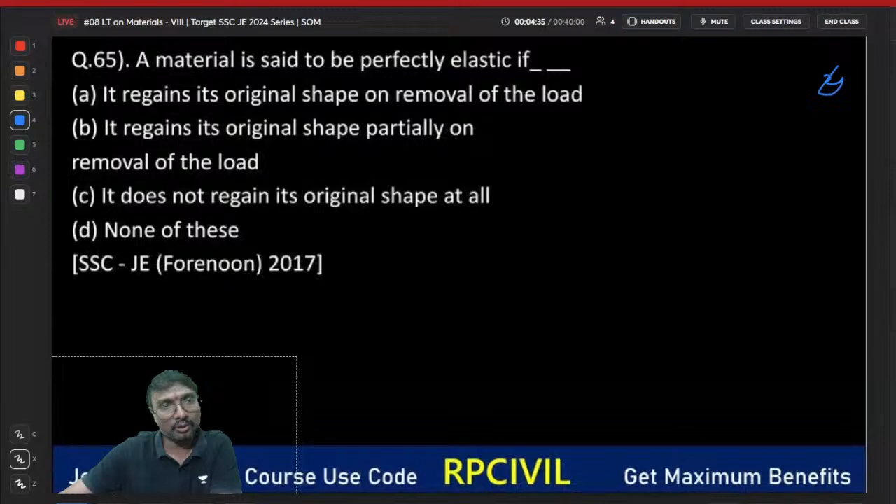So chapter 1 only, so 68 gets over, all of you. This is over, this is over. Okay, this is also over. Yeah, 66 over, 67 over, 68 also over, na? Yeah, 68 also over. Now 69th we are doing now. 69th will be going for now, you can say, right?

Yes, now shall I start the poll? Shruti, Nikhil answered correctly. Pavan also answered correctly. Only you three are there? Yeah, yes, I'll see, I'll check it now. Because just before the class you have sent, I did not see that. Just after class is started, I have seen. So I thought of answering after the class.

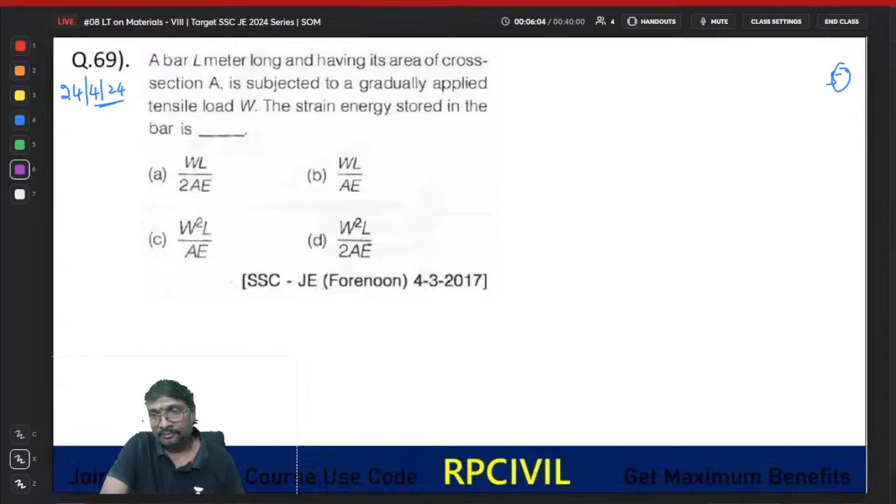Okay, right, what is that? A bar of this L meter length having its area of cross section as A, and is subject to a gradually applied tensile load of W, that the strain energy stored in this is, right? Gradually applied load, right? What is the strain energy? You can say that W square L by 2AE in a gradually applied tensile load, right? That is your W square L by 2AE, or W square L by 2AE only we are having, right? Now shall we move to the next question? That's the 70th question out of here. This is question 70. Select the answer.

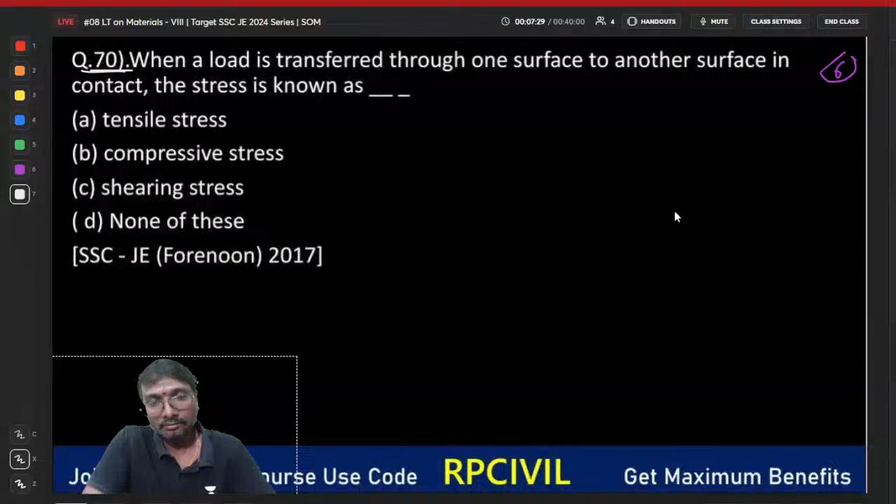Right, what is this? You can say sir is keeping a polity quiz daily. At which time is he keeping it? Gaurav, good morning, at which time?

Why am I doing polity now? Amit Vijay sir is taking the general subjects now, so why should I touch it? I should not touch it, this is not correct, na? When faculty is taking the subject, I should not interfere into his subject. Is that not good?

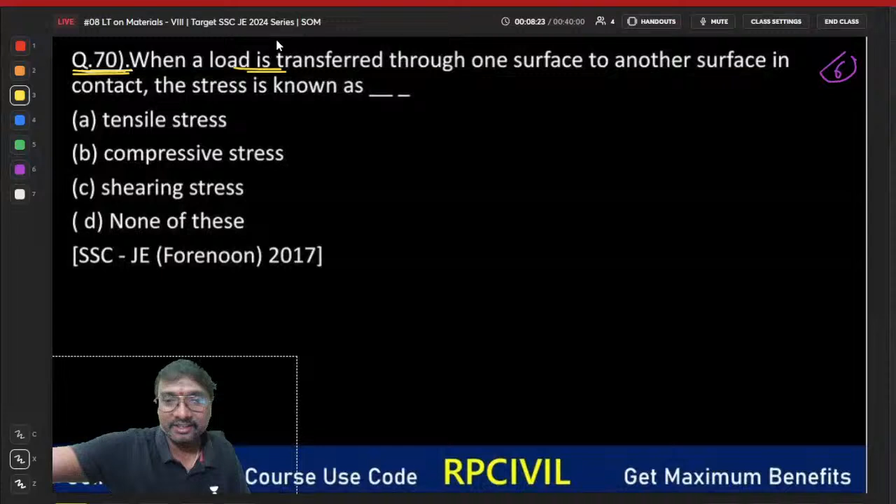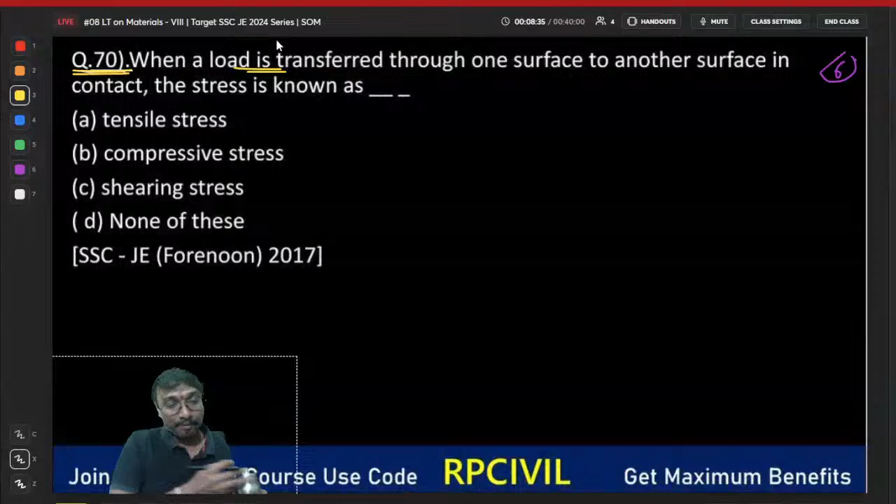You ask Amit Vijay sir to keep it. He'll keep it, I said. Anyway, he is also supposed to take the special classes. I'm keeping this quiz daily for SOM, technical, whatever subjects I am taking - there's no doubt in that. Previously when nobody was there for general subjects, I was keeping it, but nobody attended. Still I kept something for current affairs and polity. But now I should not interfere, that is not good, na?

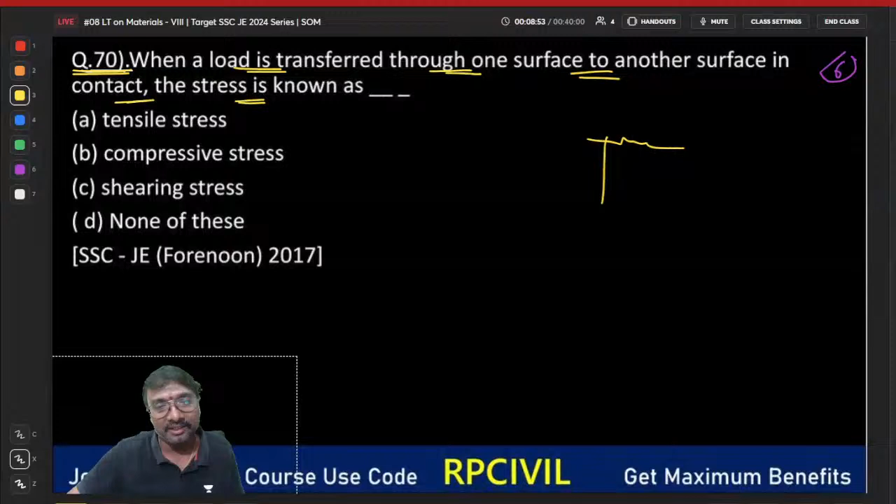When a load is transferred through one surface to another surface in contact, that stress is known as what? What is the concept when load is transferred from one surface to another? Suppose you consider this is your column, and this one you can say is your footing. So at the junction between this column and this footing, the load will be transferred, at this contact surface, right?

What is that, we have to check it. Whenever there is a load transfer, we have to check for the bearing, definitely, right? Now if you are considering this, these are your plates. And what are these - this is your rivet or bolt, whatever it is.

Whenever the loads are applied, this will be applying that bearing pressure. This plate will be pressing this bolt like this. In this case, that bearing will come into picture - it is not shear, Gaurav, it is bearing, right? Is there anything mentioned regarding bearing? Nothing is mentioned regarding bearing. Is it clear? Shall I go to the next question?

71st question. Yes Shruti, tell me. Tell me Shruti.

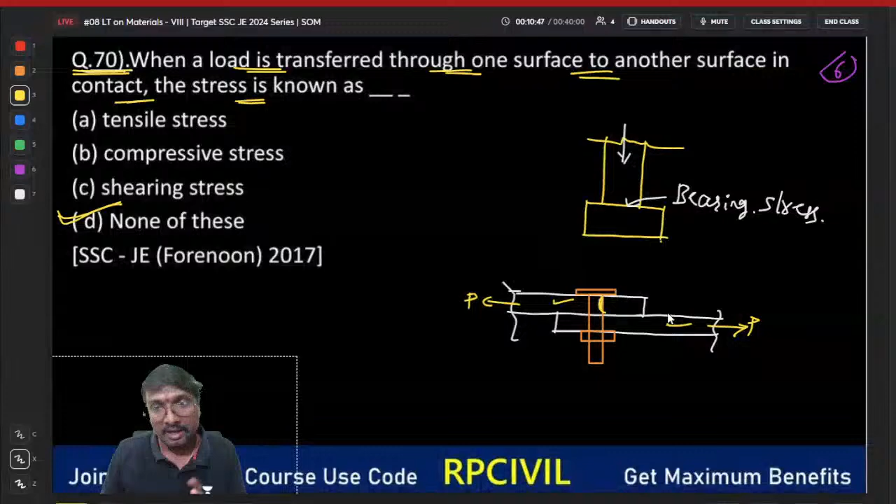Bearing means withstand, right? When the load is transferred from one element to the other element, the second element which is taking the load has to withstand it definitely, has to take that load. If it is unable to bear the load, can it transfer the load properly? Suppose if your bolt is unable to bear that load, can it transfer from the first plate to the second plate? It is impossible to transfer the load from one plate to other plate when bearing capacity is not there. So whenever there is a load transfer from one member to other member, that bearing stress comes into picture definitely, right?

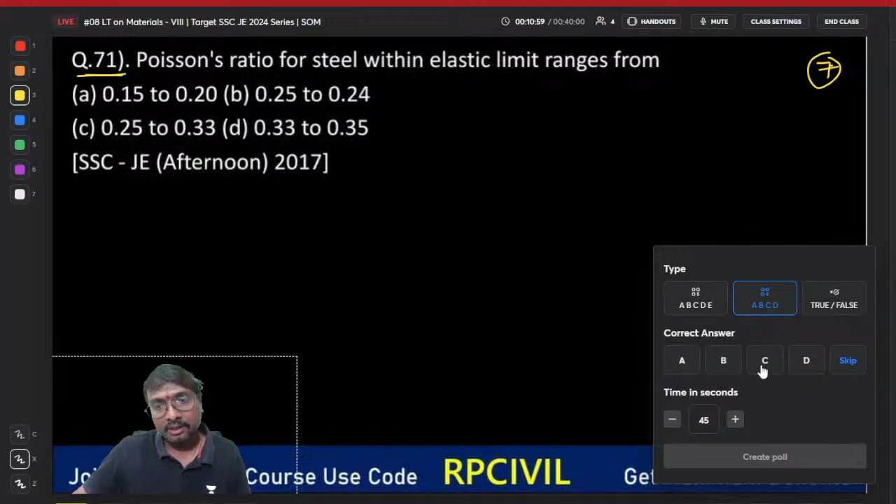Select the value for this.

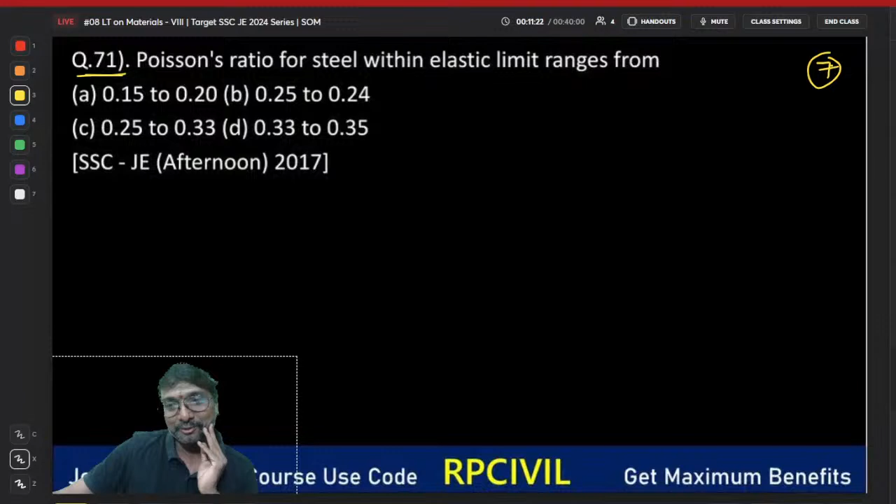Already my full time goes to plus classes, 2 plus classes, 2 special classes, 4 hours plus 2 hours plus 2 hours - approximately 5 to 6 hours I am spending daily on this only. If I take quality, then I will have to take it only at midnight.

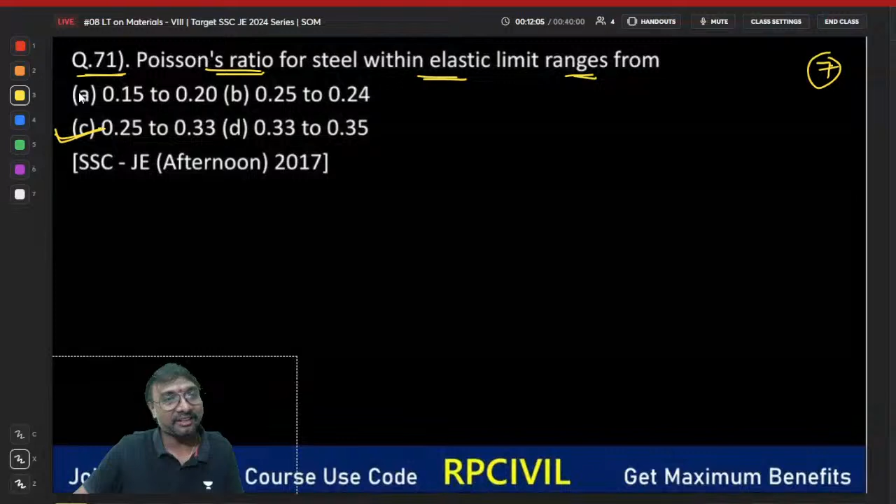Poisson's ratio for this steel within elastic limit ranges from - for this steel, you can say it is 0.25 to 0.3, or 0.15 to 0.2. Which one is correct? Is option A correct or option C correct? Poisson's ratio for this steel, everyone.

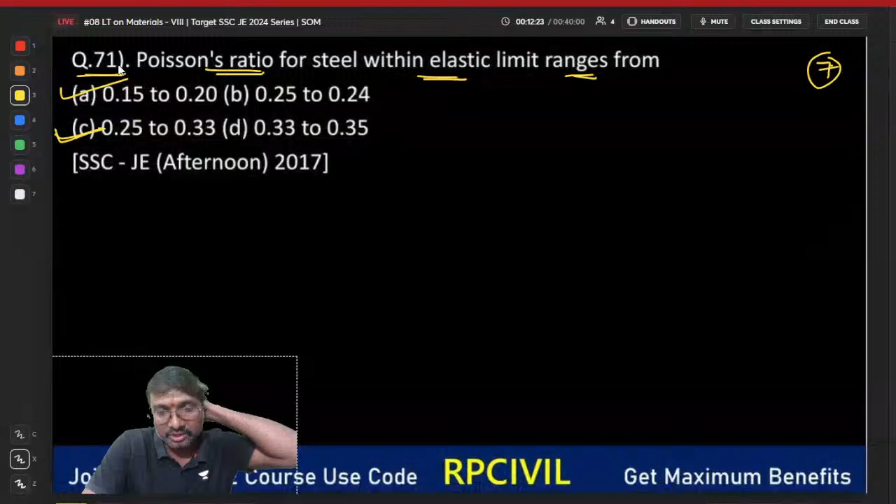Poisson's ratio for steel is how much? Tell me. It is varying from which one? This is 0.25 to 0.3, right? Yes or no? 0.25 to 0.3, you can say, right?

If you just observe concrete, a generally used civil engineering material, for concrete, how much will it be? 0.1 to 0.2, right?

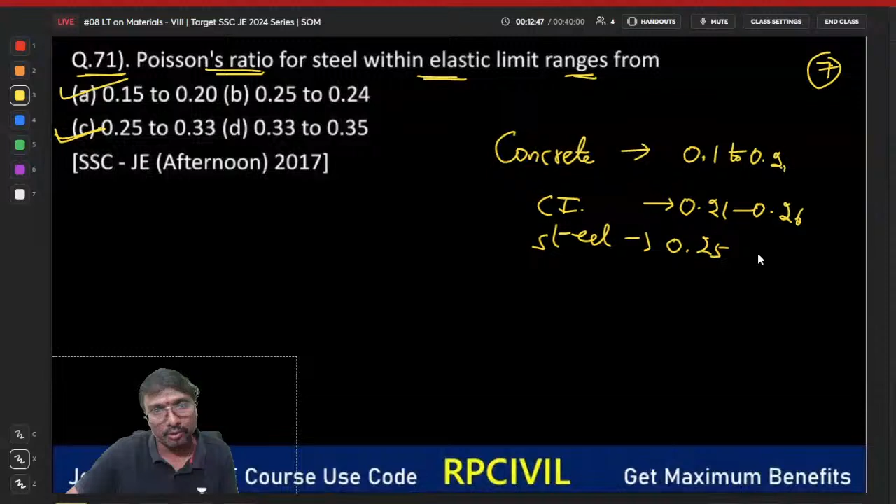And for cast iron, what is it? You can say 0.21 to 0.26 we are having. And for steel, if you just observe it, what is it? You can say 0.25 to 0.3, right? Which one is nearby approximately matching? 0.25 to 0.3 is only matching now.

Listen, 0.15 to 0.2 is for concrete, okay, not for steel. For rubber, if you just observe it, what is that? Yesterday we did one question, if you remember, 0.44999999, so it is taken as 0.5, you can say, okay, 0.5, right? Got it now, everyone?

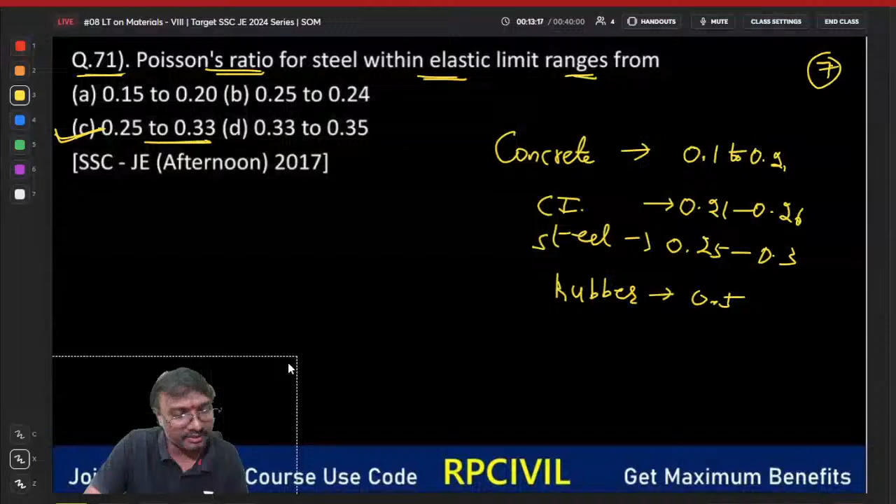Right, these are the values we are having. Okay, is it clear, Gaurav, everyone? Now shall I move to the next question, the 72nd question.

See, I am writing 8. What is it becoming, you see? I don't know what it is becoming. So what is that? If you just observe here, select the answer now for this 72nd question.

So Pavan Nikila answered correctly. Sanjeet also answered correctly.

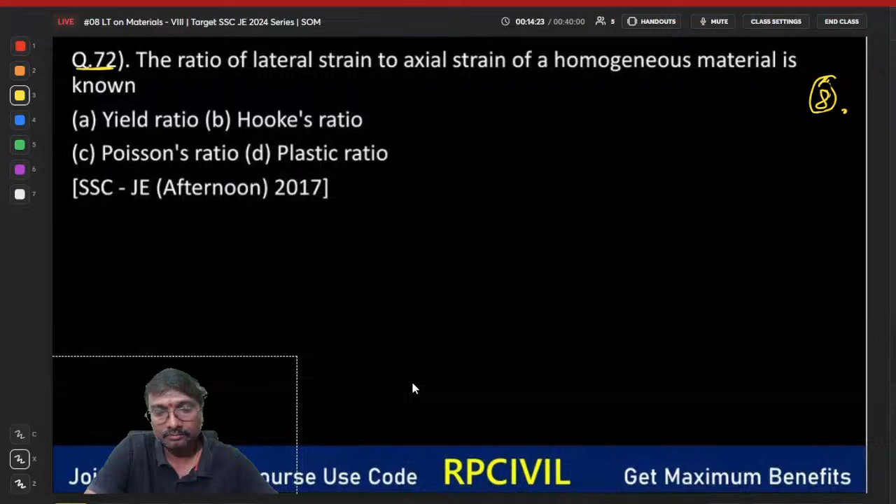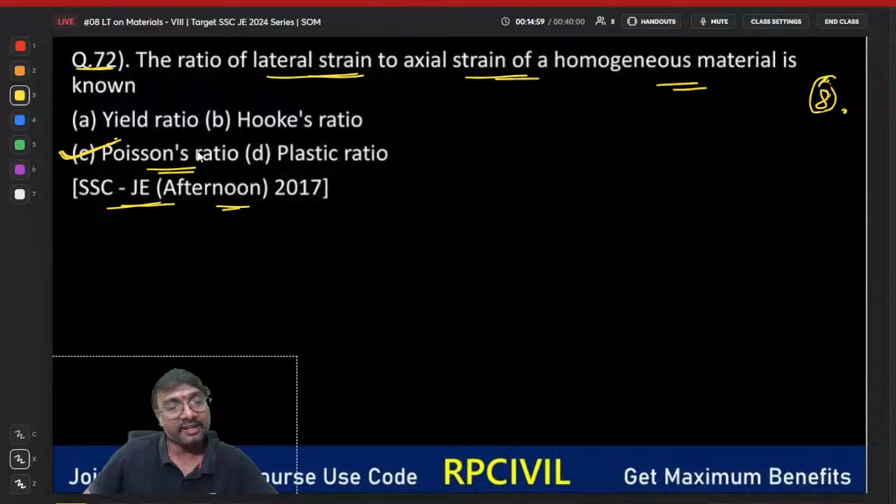Right, so what is it? You can say the ratio of this lateral strain, right? What is it? You can say the ratio of which strain? You can say lateral strain to the axial strain of a homogeneous material is called as, right? Ratio of this lateral strain to this homogeneous axial strain, right? What is it called as? It is your Poisson's ratio only, no? Yes, it is your Poisson's ratio only, absolutely, right? Yes, no? No.

This is your 9th slide, you can say, right? Shall we move on to the next question? So 60 seconds time I am giving because a little bit of calculation is required for this.

Yes, Gaurav answered correctly. You have answered for this only, Gaurav. 73rd question.

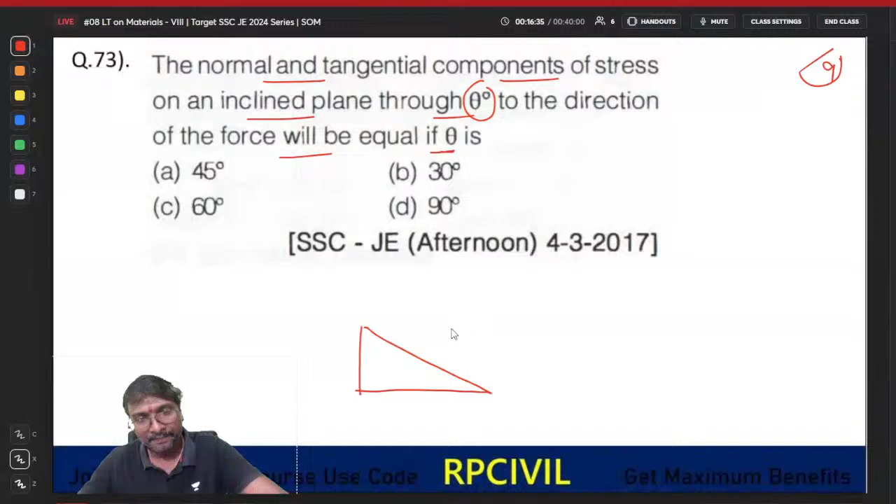Right, so the normal and the tangential components of a stress on an inclined plane through theta to the direction of the force will be equal if theta is right. So when these are equal, if you just consider this is your inclined plane, let us say just for an example, right? TP, good morning. So this is your inclined plane, let us say, right? What is this, right? This is theta, sorry, this is your sigma you are getting, right? This is your sigma. At which angle it is present, that is your theta, right?

Now what are the components? You can say one component is parallel, one component is perpendicular, right? What is this tangential component? You can say that is your sigma cos theta, na? This is your which one? This is sigma sin theta, right? Sigma cos theta, and this is your sigma sin theta, right?

Got it? No. So I'll move on to the next question, the 74th question. Shall I go for it?

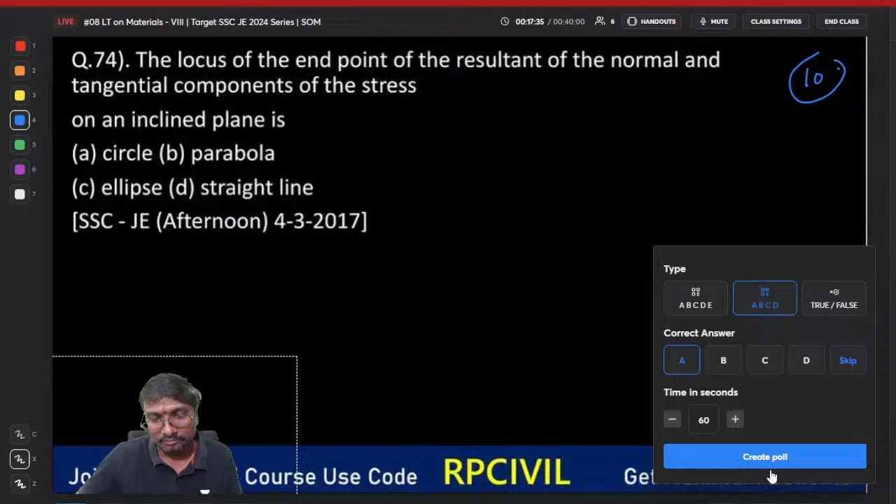Okay. Oh, okay, okay. After this question, I'll wait. Don't worry. Okay, Stuti. After this question is over, I'll wait. Don't worry.

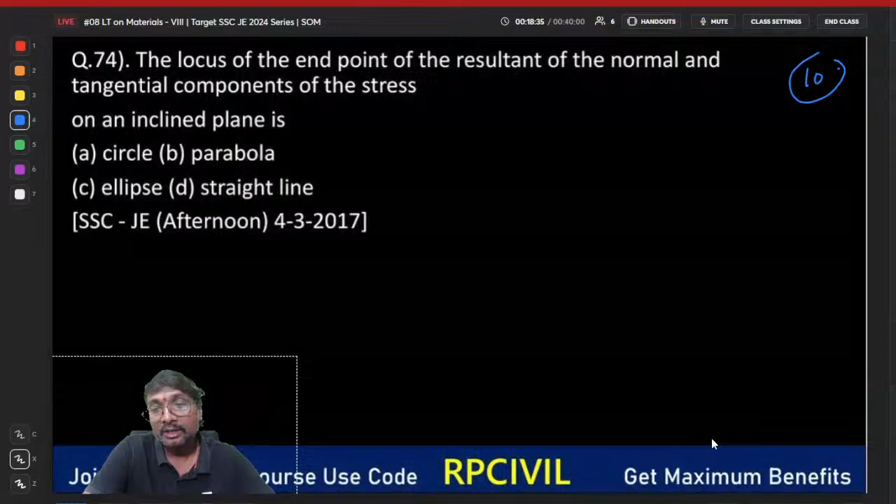Locus meaning it is the point. Suppose a particular condition, any geometry satisfying that condition, right? Any geometry satisfying this condition, so our particular point will be on that geometry, right? That is what you can say. Okay, our particular point will be on that geometry.

So the locus of which one? The locus of which one, you can say? The locus of the end point of resultant of the normal and tangential components of a stress, right? Locus of which one? These end points of this resultant, right? On an inclined plane is, right? What is it you can say? The locus of which one? This resultant of what, right? Resultant of this normal as well as this shear stress. It comes to be which one? Tell me, anyone? That is your Mohr circle comes to be actually, okay?

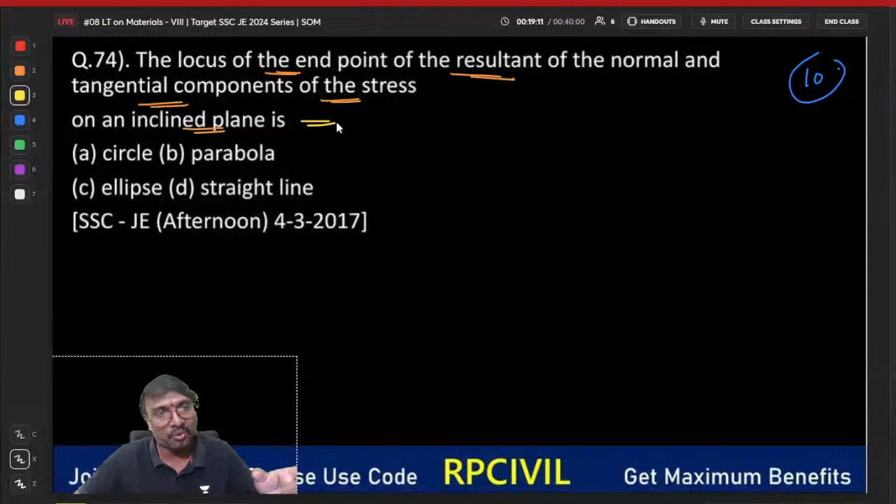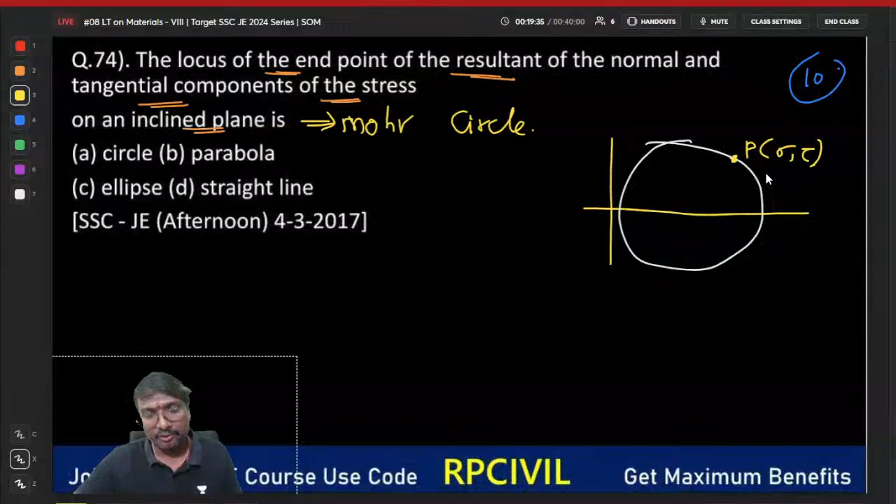That is your Mohr circle. If you are drawing this Mohr circle, at every point, what can you say? This point is a combination of sigma and tau, isn't it? So resultant of which one? This is the point corresponding to what? It is representing a normal stress as well as this shear stress, right?

Locus means what? It is the point representing which one? It is a point satisfying our mentioned condition and resulting in some particular geometry. That is the meaning of locus. Okay, got it?

So here circle it will be giving, right? Mohr circle is the locus of the end point of the resultant of the normal and tangential components of a stress. Normal and tangential means normal stress and shear stress - both resultant will be represented by this Mohr circle only, no?

Every point, this P point is a locus point. That is a point satisfying the circular equation. This is also a locus point, where a normal stress will be there and a shear stress combination will be there, right? At every point on the Mohr circle it is representing that normal stress as well as tangential stress. Got it? Okay, note this and tell me.

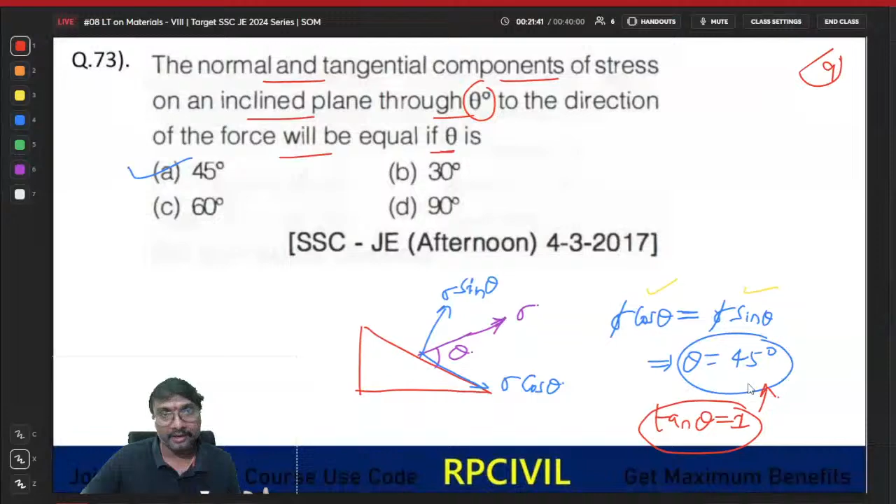Okay, then this one, 74th. Shall we move to the next one, 75th? Select the answer.

So 1 TP answered correctly.

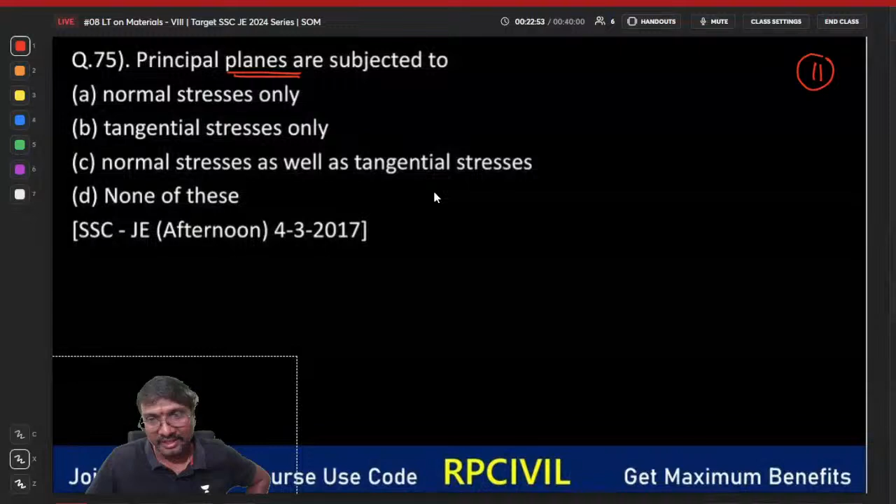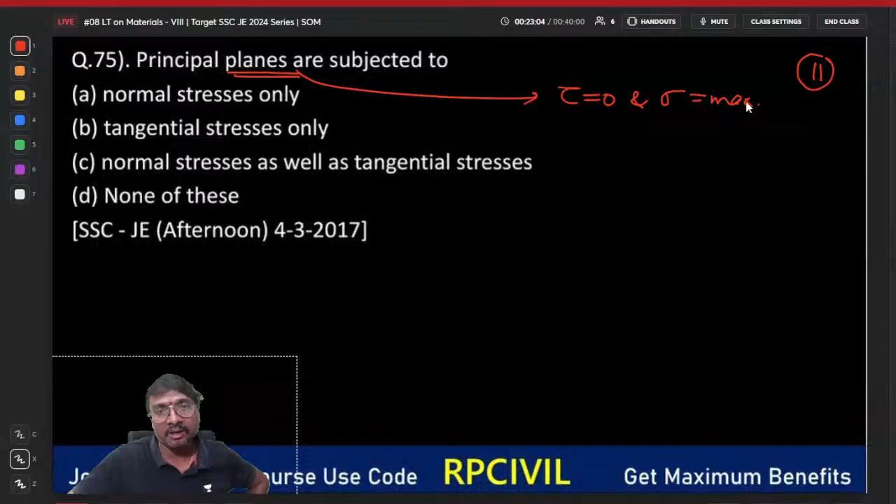Principal planes are subjected to, right? What are these principal planes? You can actually, this is second chapter question. Okay, let it be. Principal planes are the planes on which shear stress becomes 0 and normal stress becomes maximum. So only normal stress is present, only normal stresses are present. Shear stresses are not present, or tangential stresses are not present. Then only those planes are called your principal planes. Right? Got it?

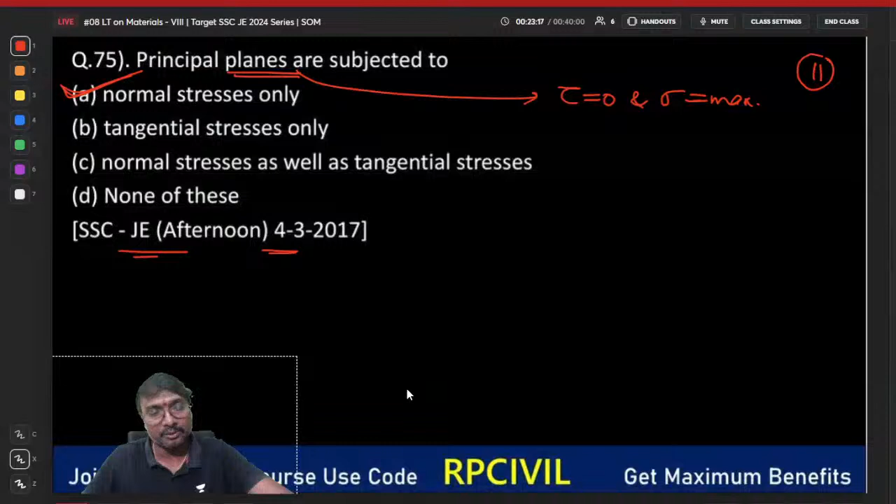Shall we move to the next question? So the answer - 76th question.

Gaurav, check it. Sanjeet TP answered correctly. What about the others?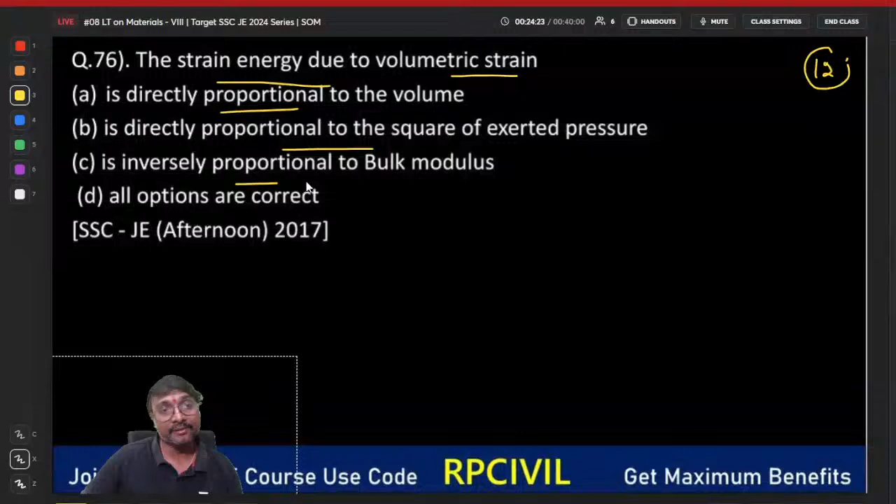Here, the strain energy due to the volumetric strain is directly proportional to the volume, directly proportional to the square of the exerted pressure. It is inversely proportional to the bulk modulus, and all the options are correct. Which one can you say?

That strain energy is nothing but stress into what we have to take due to this volumetric strain. Stress into volumetric strain we have to take, isn't it? So sigma into delta V - change in the volume. Now here actually what is it equal to?

This is equal to, sorry, strain energy is equal to what originally? We'll check it, we'll check which one is correct. Don't worry, we'll check it. We are checking now. So what is the strain energy actually?

Stress into strain. What is the strain? Volumetric strain, into that volume. So what can we write - stress into the volumetric strain, delta V by V, into that V. So this V cancels, right? That is why I have written sigma into delta V. Now understood why I have written sigma into delta V?

Now here, strain energy due to the volumetric strain - what can you say? Strain energy is directly proportional to this V, or not - volume.

It is directly proportional to this volume, is it not? And it is directly proportional to the square of this external pressure. Is it directly proportional to the square, or is U also directly proportional to this sigma only? Square of the pressure, or pressure power 1 only, stress power 1 only.

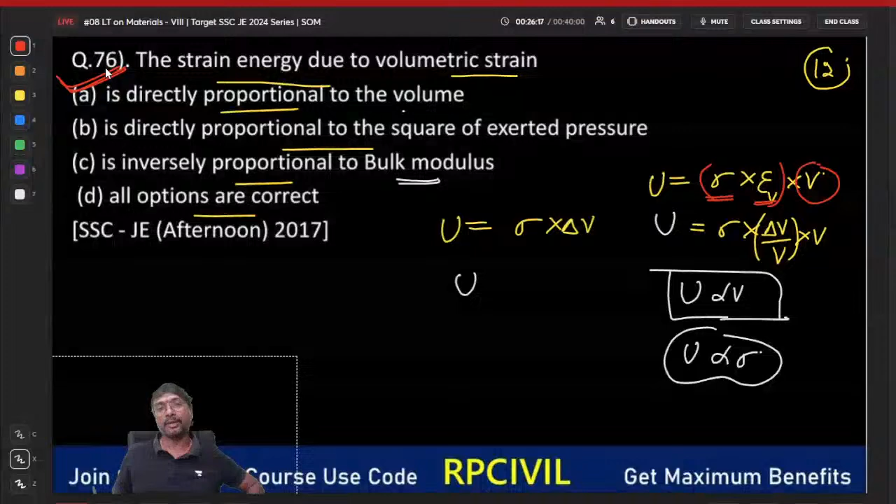It is inversely proportional to the bulk modulus. No, it is not inversely proportional to the bulk modulus. It is directly proportional to the bulk modulus only, no? So tell me, what is that? Which one is appropriately and correctly present? Stress into volumetric strain into volume. So strain energy is directly proportional to volume - is that the only nearby correct answer present or not? That is the only nearby correct answer present, you can say.

77th question, shall I?

Why it is rotating in the YouTube, I don't know. Sometimes suddenly it is rotating the screen.

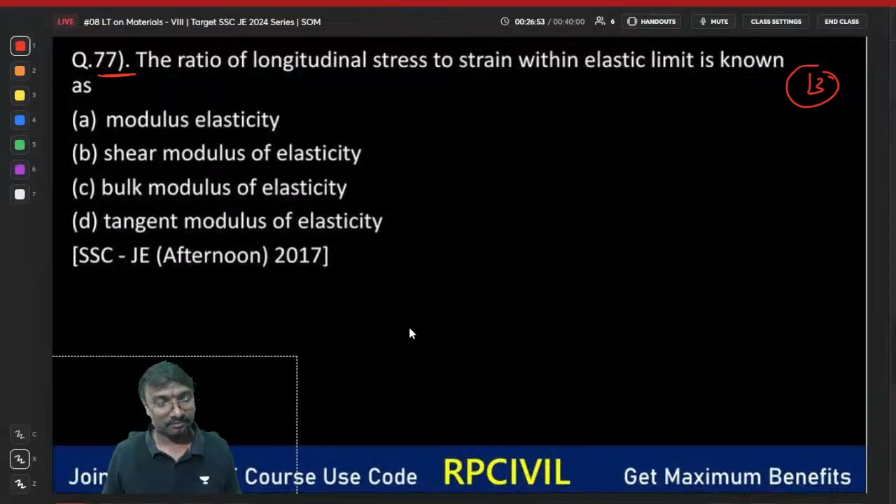Yeah, TP, Sanjit, Shruti, Pavan, Nikhila answered correctly. This is the question everybody answered, na? You should have to answer correctly. If not answering correctly, na, I will be bringing a stick. Because this is a chota bacha question, na?

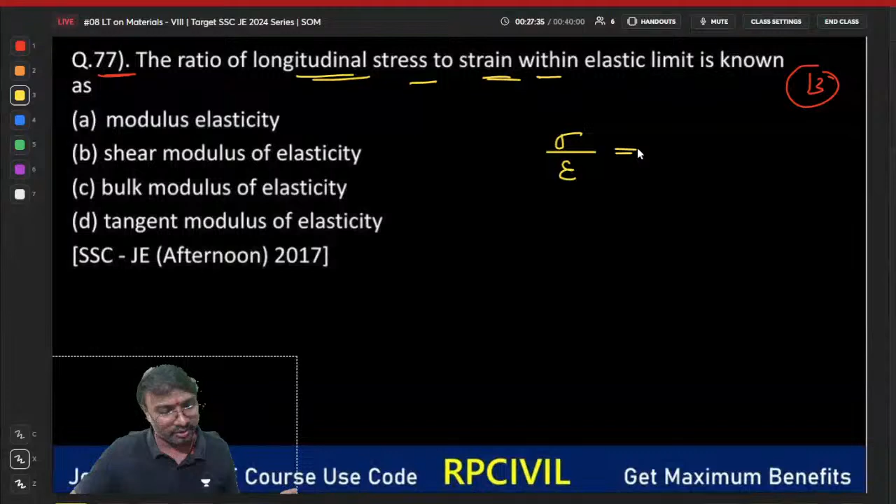The ratio of this longitudinal stress to the longitudinal strain - what is that? Ratio of longitudinal stress to the strain, what is it? You can say Young's modulus, na? Yes, Gaurav, correct, right? It is a modulus of elasticity or not? Young's modulus, E value. What is this one?

Shear modulus, G or N, this is C equal to, what is it? You can say that is tau by phi, na? Bulk modulus, what is that? K equal to, what is it? You can say K is nothing but sigma by this volumetric strain.

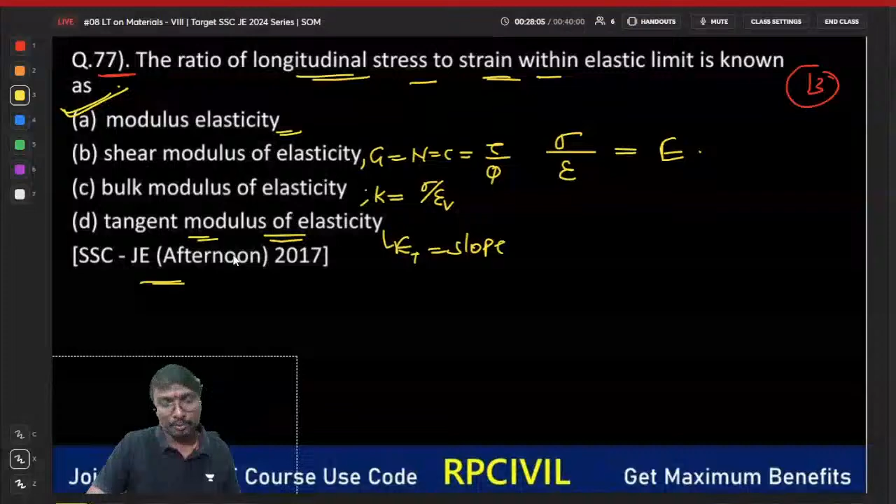This tangent modulus of elasticity, that is ET we are representing, na? ET, is it equal to simply the slope of this curve or not? It's the slope of this stress-strain curve at any location wherever you want. Right?

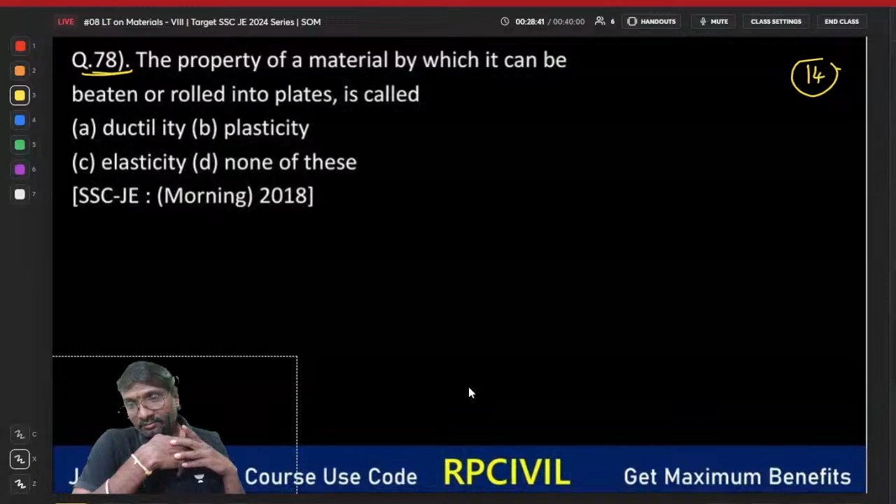Sanjit, Pavan, TP, Shruti, Nikhila answered correctly.

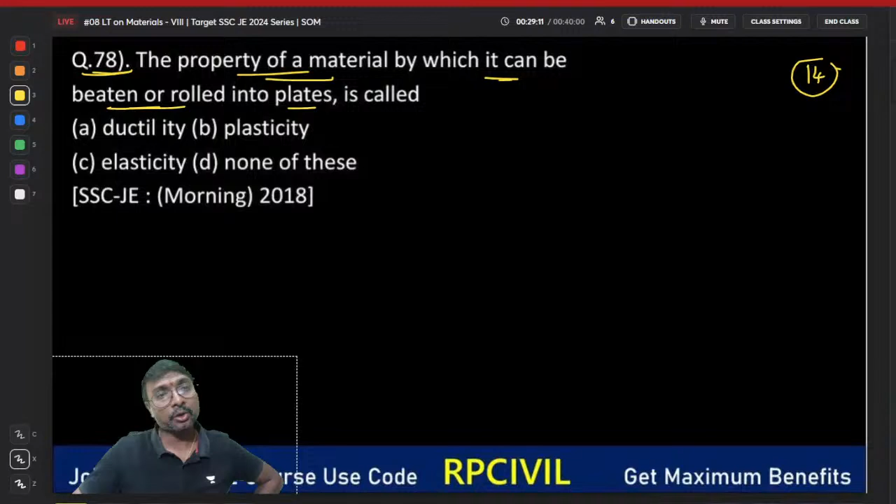So what is that? The property of a material by which it can be beaten or rolled into plates - thin plates or sheets, right? What is that you can say? That is called malleability, na? That is called malleability or not? This is malleability, you can say, right?

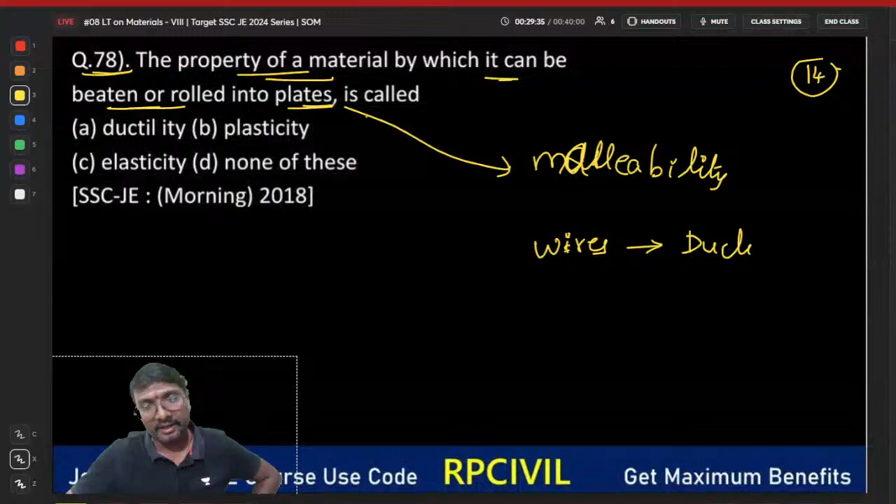And it can be rolled into thin wires. When it is rolled into thin wires, right, what is it called as? It is called ductility, na? Into thin wires, if you are doing that, that is called ductility, you can say.

Is it? So which one is the answer? None of this is the correct answer, na everyone? None of this is the correct answer, you can say it.

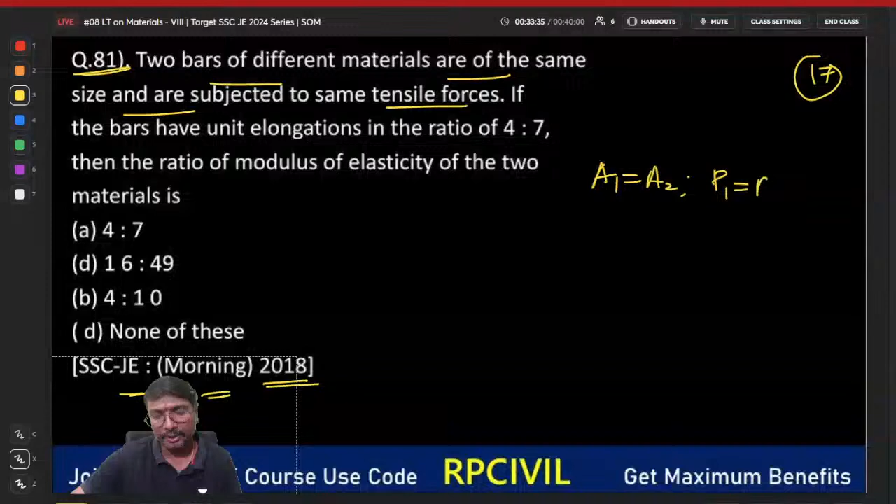Two bars of different materials are of the same size and are subjected to the same tensile force. Same size means A1 equal to A2, and same tensile force means P1 equal to P2. So A1 and P1 both are same, cross section area and loads are same.

If the bars have unit elongation in the ratio of 4:7, what can you say? That is delta 1 by delta 2 is equal to 4/7, the elongation ratio.

Then the ratio of modulus of elasticity of these two materials is found as follows. Delta 1 is equal to PL divided by AE1, because P is the same, length is the same, A is the same, sizes are same means L1 is equal to L2. And delta 2 is the same P, same length, divided by the same area, but E is different.

Now, what is delta 1 by delta 2? It comes to be PLA cancels, giving E2 by E1. Then what is E1 by E2, tell me.

E1 by E2 comes to be delta 2 by delta 1. What is delta 2 by delta 1? That is 7/4 exactly. But is there any option with 7/4? No option is there with 7/4, so none is the correct answer.

Got it now? Everyone clear? Everyone clear, all of you?

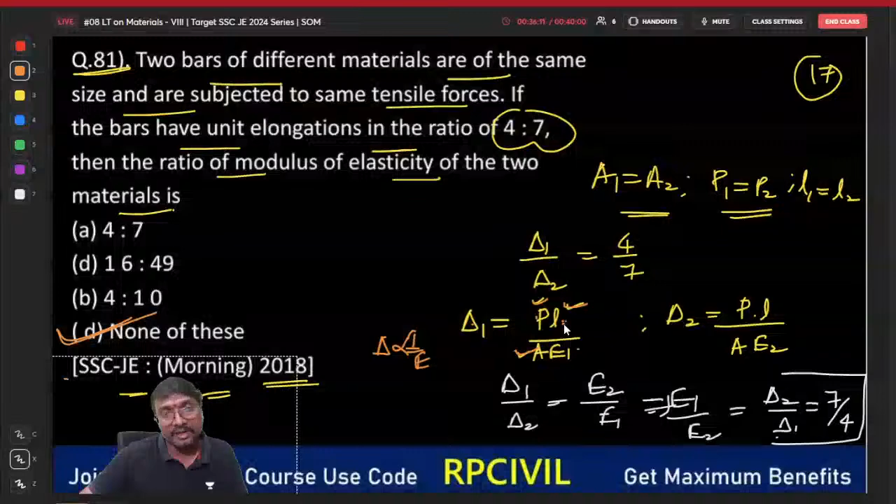Delta is equal to PL by AE. Load is constant, so you need not consider it. Sizes are the same for both, L is constant, A is constant. Therefore delta is inversely proportional to E, which implies E is inversely proportional to delta.

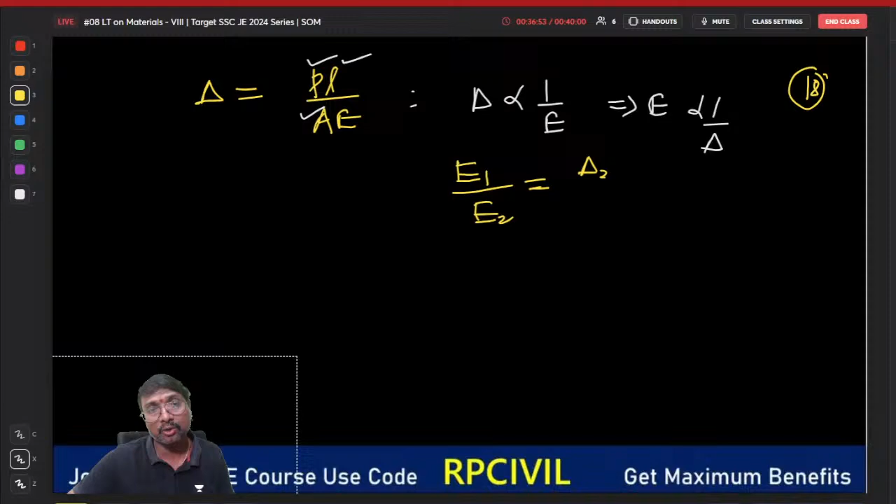Then you are asked to identify the ratio of Young's modulus, E1 by E2. E1 by E2 is nothing but delta 2 by delta 1. We know delta 1 by delta 2 as 4 by 7, so delta 2 by delta 1 comes to be 7 by 4. Now understood why it is taken ulta?

Got it? Because E1 by E2 only you are asked.